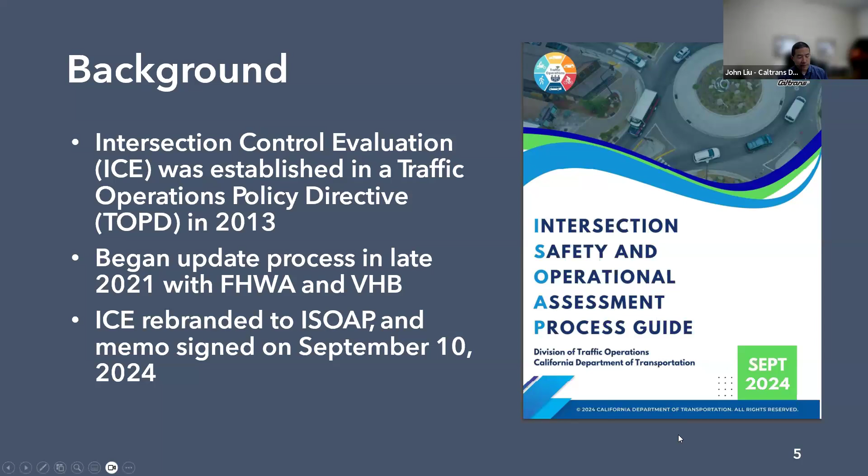Many other states, about a third of the states, have some kind of ICE process, and several states have had many iterations with improvements. So we really wanted to work with our partners at FHWA. They had their consultant, VHB, come on board, and we developed, over the past 2.5 years, the new ISOAP. We also wanted a rebranding that really kind of emphasized safety, so safety is part of the actual name of the new process.

So going back in time, what was ICE? ICE was a framework to make decisions for intersection control. It wasn't really meant to be a new process, just a framework to help guide the decisions that are to be made. It was a two-step process: you had your initial screening, which was kind of the fatal flaw analysis, just so that you could drill down to look at the most viable potential alternatives, and then you went into the detailed engineering analysis. That's going to be very similar to what we're doing with ISOAP. We didn't want to start with a blank slate because a lot of ICE actually worked very well, so we really wanted to build upon ICE and just make it a little bit more effective.

And why did we need to update ICE? Besides the length of time, Caltrans has a lot of new strategic directions that we're trying to incorporate in how we could better design, maintain, and operate our state highway system. A big emphasis on complete streets, we have a Director's Policy 36, and here we have our Vision Zero target for 2050, where we want to eliminate all fatal and serious injuries, not only on the state highway system, but on the entire transportation network, including the local street and road network and tribal lands.

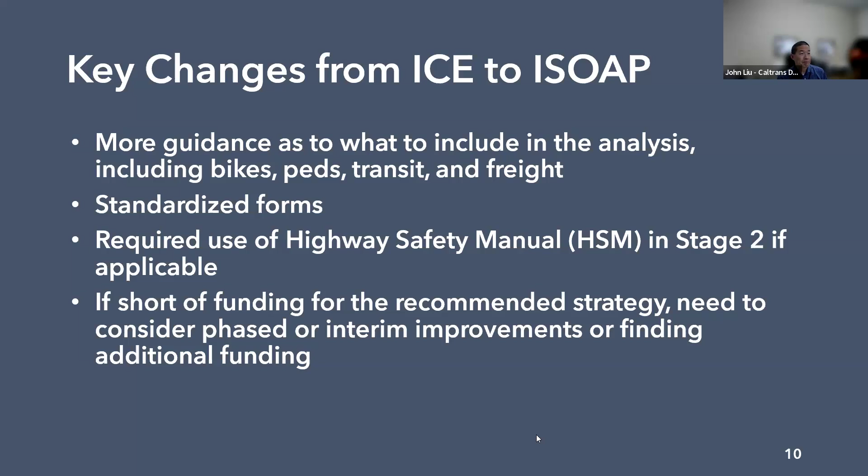So the solution needs to support a safe system approach, and this is also very context sensitive. When you're looking at locations with a lot of access points and vulnerable road users, that's where we want to make sure our infrastructure supports those types of users. We also want to make sure our staff in the traffic safety branches concurs with the recommendations ultimately made for intersection control.

We do have some streamlined processes for a couple situations. The first is you can automatically go to a stop sign if it's a very low volume access point, where signal warrants are not going to be met within 20 years, and there aren't any special features or conditions that would warrant additional controls.

The second streamlined process is for single lane roundabouts. If you have relatively low volume, 25,000 ADT, you could go directly to a roundabout without analyzing the signal as an alternative, if signal warrants are going to be met within 10 years, or if you have a crash history that can be addressed with a roundabout or signalization, and if the cost of the roundabout is somewhat commensurate to signalization.

We do know that a lot of times there is public concern and controversy. So if you are expecting that, or if you're having to go through an eminent domain process, you're going to want to go through a rigorous environmental process and look at various options and alternatives. Just keep that in mind if you do plan to use a streamlined process.

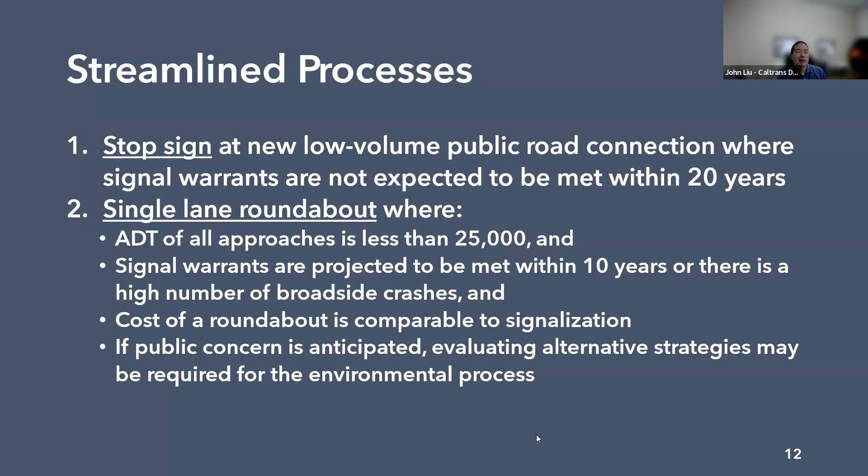We do have a question, John. We have one question that states: can you elaborate on what you would like to see as part of the HSM analysis in stage 2? Is Caltrans planning to update their HSM application guidelines?

Great question. One thing we recognize is not a lot of folks are experts on the Highway Safety Manual, and there's actually going to be a revision to the Highway Safety Manual, a document put out by the feds. Within Caltrans, it's our division of design that takes the lead in providing support and training. For our local partners and consulting engineers, my recommendation is to work with your districts to see what training the districts offer. I can't specifically talk about what additional guidance or training headquarters is going to provide, but because there are a lot of changes coming to the HSM, I would expect additional guidance.

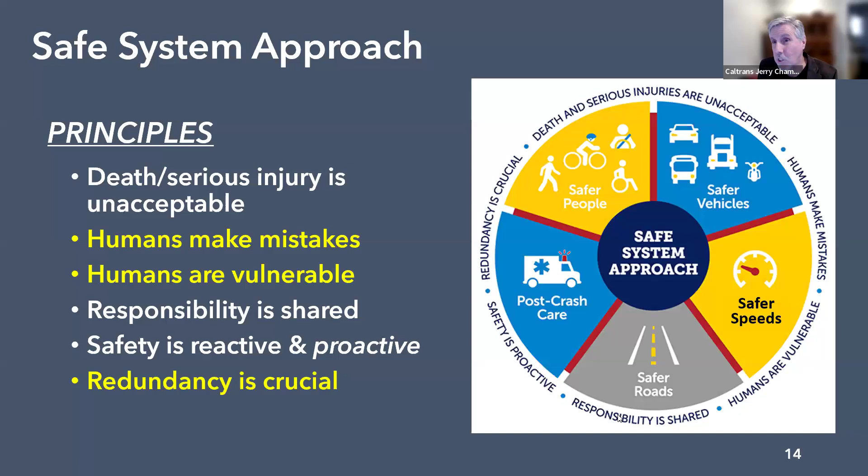Another thing to emphasize as we go through this, and later in the program Phil Rust in particular will talk about how important redundancy is, redundant systems to get to the outcome we want, which is zero, eliminating fatal collisions. Again, humans make mistakes, road users make mistakes, everybody makes mistakes, and that's part of being human. So the question here is, why should people have to pay the ultimate price when they make unintended mistakes?

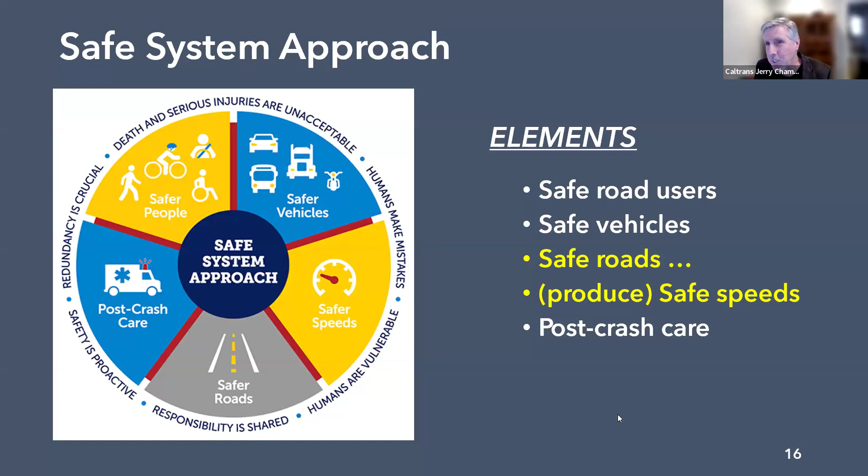Let's go forward. Thank you. The other thing to really keep in mind today is what's important about the safe system approach is its emphasis on safe roads or infrastructure, and in particular, infrastructure that produces speeds that are safe. This is where there are a lot of strategies for intersections, some of which get partial reductions in speed, others get full or 24/7 reduction in speeds to a safe speed.

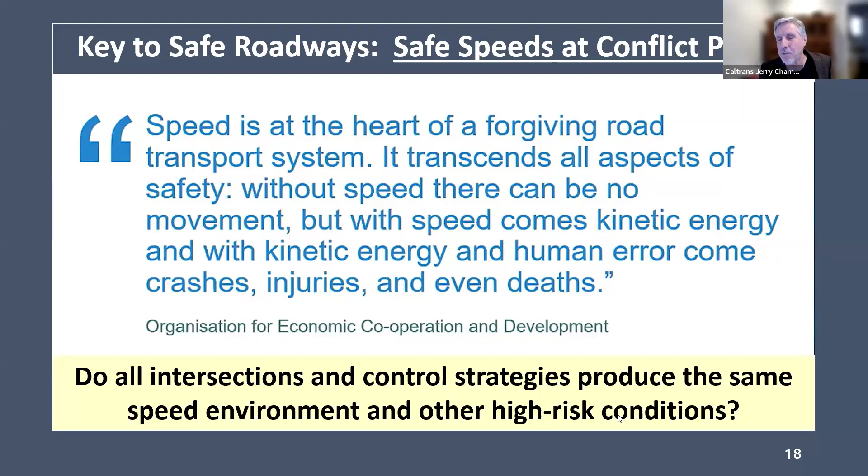The main point here is that ISOAP is a tool, a process, that helps us identify the optimal solution, not just for safety, but considering the most important goals we have, mobility being one of them, even environmental goals. Let's go forward. So I'm going to talk now about safe system intersections, let's go forward.

What's important today is we know that traffic safety has for a long time been a reactive practice, one that is in response to problems. We do have programs now and emerging ones looking at systemic safety and doing things proactively. But ISOAP is proactive in a way. It's used for all projects or capital projects that include intersection or interchange improvements or the addition of those things.

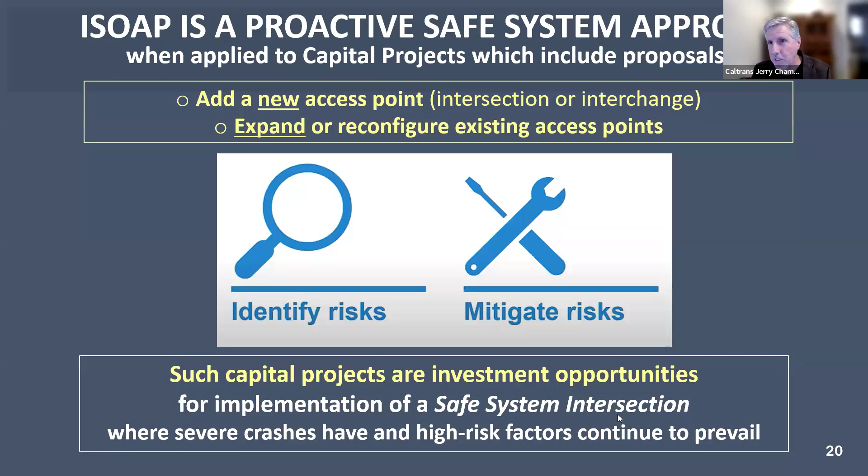So it's not just for projects at spot locations, but could be long corridor projects in which access is part of the solution. What we're doing is considering the safety risk and also the outcomes for all projects, not just looking at safety within the context of a safety improvement project. So whatever the capital project is, if access is part of it, ISOAP will help us identify the optimal solution based largely on how the different alternatives perform in terms of safety performance.

Just to touch on where we have been and where we're going with the safe system approach, I think ISOAP is doing all of this right now. I want to mention a few things highlighted here. The traditional approach, reducing crashes, has always been a goal, and of course now the focus is on preventing death and severe injury. Traditionally we've been trying to help drivers and others make better decisions, good behaviors, whereas the safe system approach acknowledges it and says let's just design for those mistakes.

We'll never prevent them. From traffic calming and speed enforcement, always trying to accomplish lower speeds with tools that can't get us there, safe system is now focused on reducing the transfer of kinetic energy when there are crashes. Again, acknowledging crashes are going to happen just like people make mistakes, but let's lower or reduce the outcome. Of course, designing for peak conditions has always been something we do, but now we want to look at all conditions, including darkness. We'll get into comparisons of some solutions that are safe system and others that have safety as part of the benefit. Let's go forward.

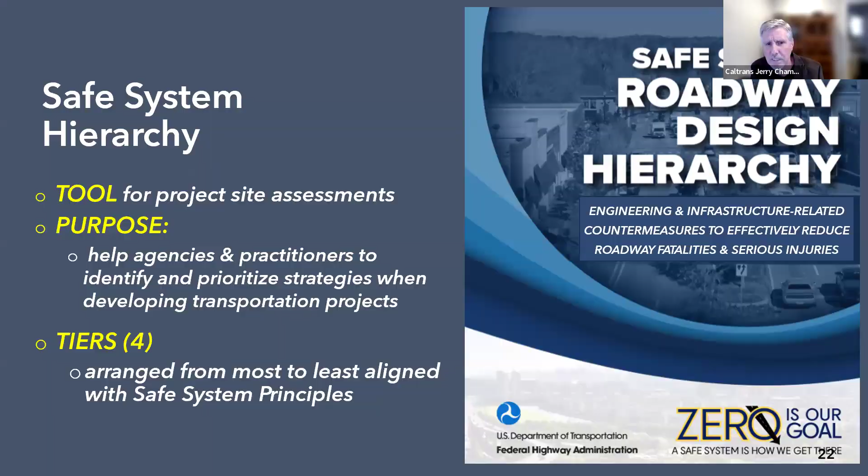In these tiers, tier 1 best solutions are those which remove severe conflicts. Tier 2 is reducing vehicle speeds, which can go together very well with tier 1, both equally important. To a lesser degree, tier 3 is managing conflicts in time, such as traffic signals. And tier 4 is increasing attentiveness and awareness.

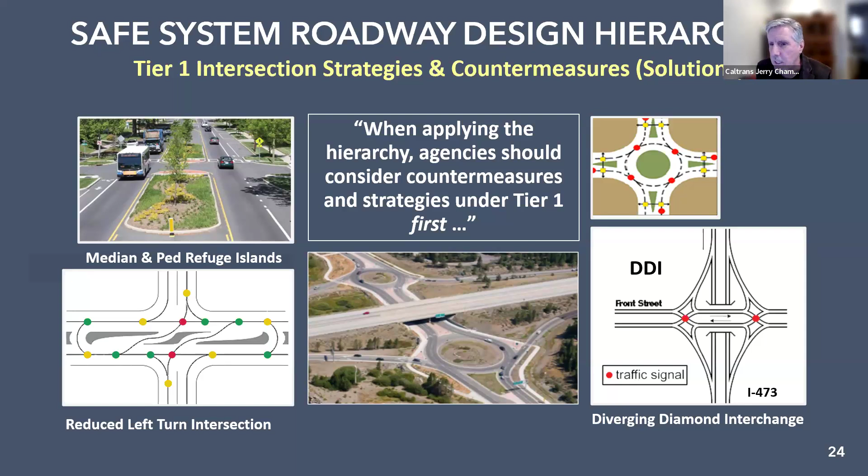These are examples of strategies identified as aligned with tier 1 of the safe system. The whole point of this hierarchy is that when applying it to projects, agencies should always consider the countermeasures and strategies under tier 1 first, prioritizing improvement alternatives by looking at tier 1. We'll cover these in more detail - especially the reduced left turn intersection, or R-CUT, roundabouts, and the diverging diamond interchange.

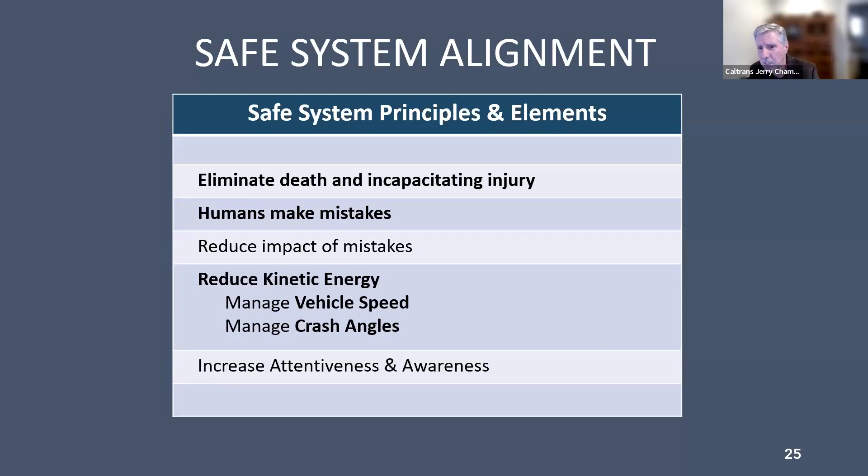Going back to earlier slides, I pulled off a few of the more important things to see if we are working and pursuing improvements that are in alignment with safe system - these are the key principles and elements. I've already mentioned these, but I want to come back to them in a minute.

If you look at where our most severe crashes occur on the smallest part of the overall transportation system, it's a lot easier to focus on access points than on segments and corridors - it could also be less expensive. So it's very logical to look at intersections as we jump off, and some of our partners have already done this, looking at intersection safety programs in particular.

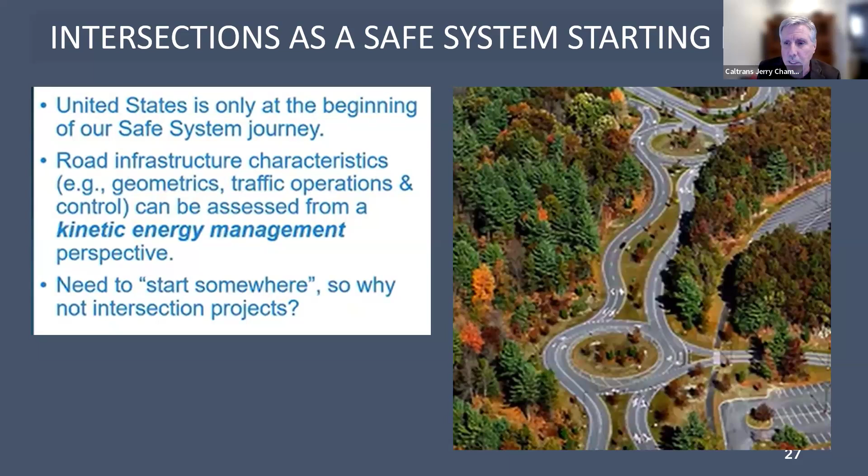So again, looking at where do we start, or where can you start as an agency - intersections should definitely be prioritized.

So let's go back to the other strategies. In addition to roundabouts and traffic signals, which I've already talked about, let's go forward and look at the list.

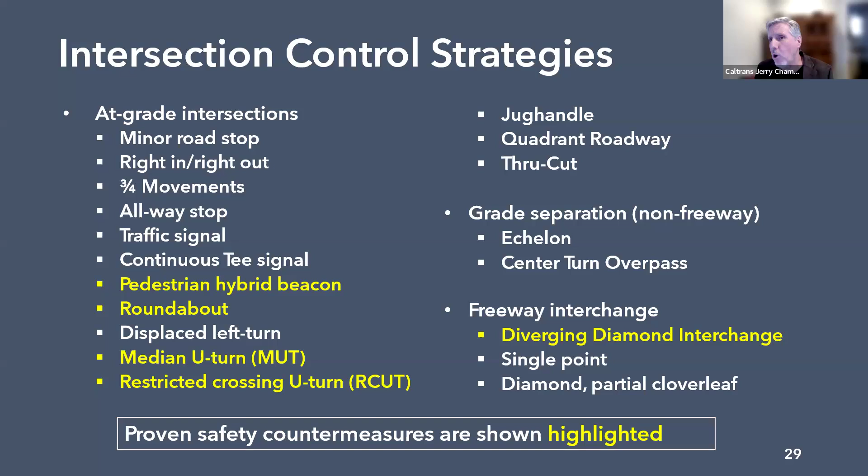And these are proven safety countermeasures. That's why we want to look at these first, because they are solutions for all access or new access, but they also have the best safety performance. Let's move forward.

One of these, the pedestrian hybrid beacon, is definitely a proven safety countermeasure, but has limited applications—this is really for pedestrian crossings only, and it works part-time. So it has minimal impact on traffic flow, unlike signals, but is very effective.

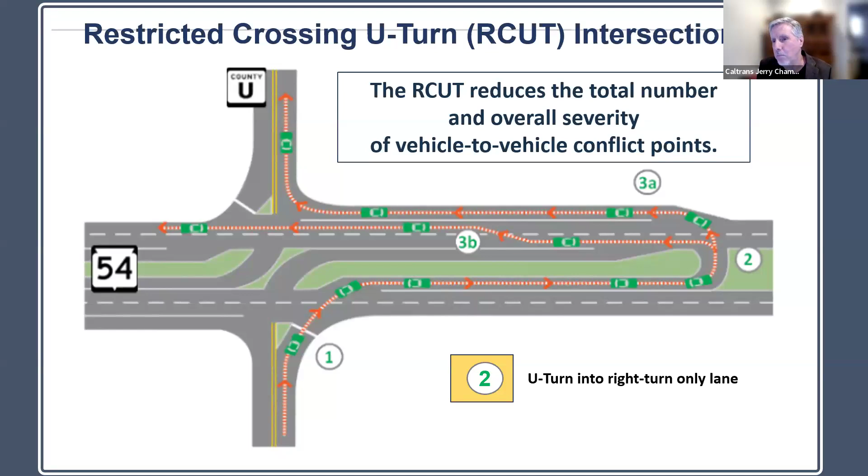Let's go next. I want to talk about and then show you a couple of examples of what are overall called reduced left turn conflict intersections. People might know these better under the terminology restricted crossing U-turn, or R-cut intersection. Basically, this takes movements at an existing intersection and converts and relocates those, in particular the crossing movement—in this case allowing drivers to turn right in order to go straight or left. So it definitely has pros and cons with respect to mobility, but is proven to be safer.

And again, these benefits range from primarily around 50% up to 63%, depending on the type of controls added to those intersections. And again, the intersections are at the major approach, but U-turns are also introduced on either end. Let's go forward.

Roundabouts. This is worthy of a virtual tour because there are now so many different types. They come in all shapes and sizes, and of course that means costs as well. The good news is there are much lower cost versions of roundabouts, in particular the smaller roundabouts.

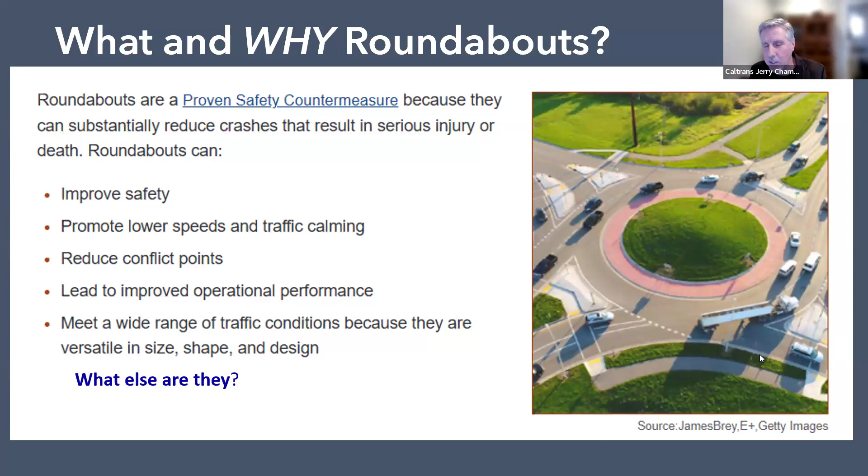These are emerging as being very effective for a significant range of volumes. Roundabouts do more than improve safety, obviously. They calm traffic, and they handle traffic more efficiently. No waiting, no stopping when there is not a conflict is the main reason for that. So operationally, they're as good as you can get at an intersection control strategy.

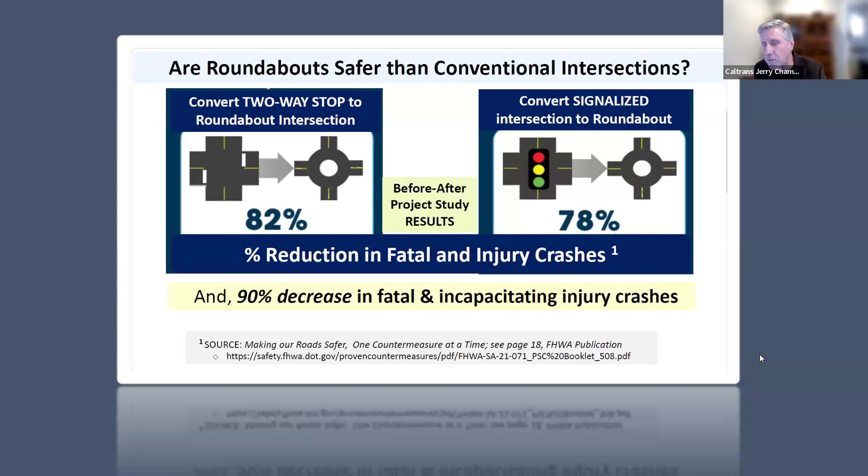For safety and a safe system approach, this is very important. This has been known for a long time, and various studies have supported this finding. Converting an existing intersection that is signal or stop sign controlled gets about an 80% reduction in fatal and injury crashes, and even more importantly, a 90% decrease in fatal and very severe crashes. This shows the difference between the safety performance of roundabouts and traffic signals.

The range of applications - roundabouts can be the key for road diets to work, being able to implement a road diet without causing a problem or diverting traffic to other corridors. It's been proven that you can eliminate or replace traffic signals to get narrower roadways, and roundabouts handle that traffic.

We now have so many different shapes and sizes, and there's a term that's come out in the last 10 years or so calling these affordable roundabouts. These can be installed for a fraction of the funding and time required for conventional size roundabouts, and even materials and construction methods differ.

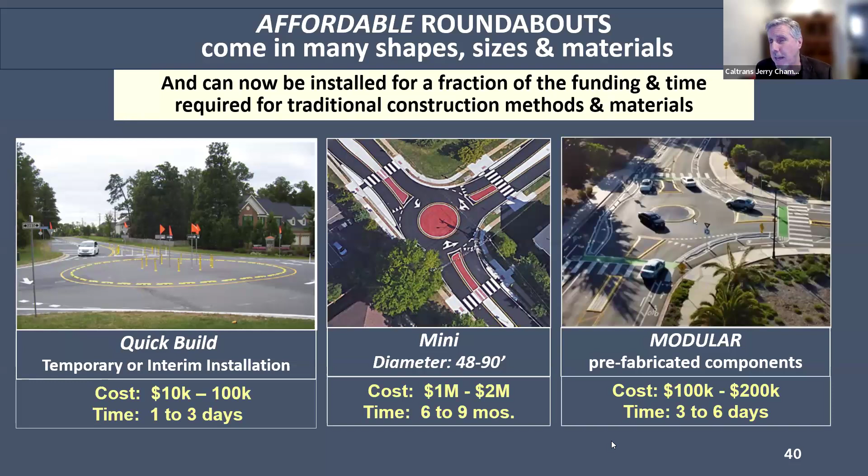This is another important development, because modular means prefabricated components that are basically installed onto or nailed to the pavement in general. If you think about footprints in 3 dimensions, we're saving work instead of excavating, which we normally do for repaving. This avoids much of that expensive excavation work, by being able to work within an existing intersection footprint, with installation on top.

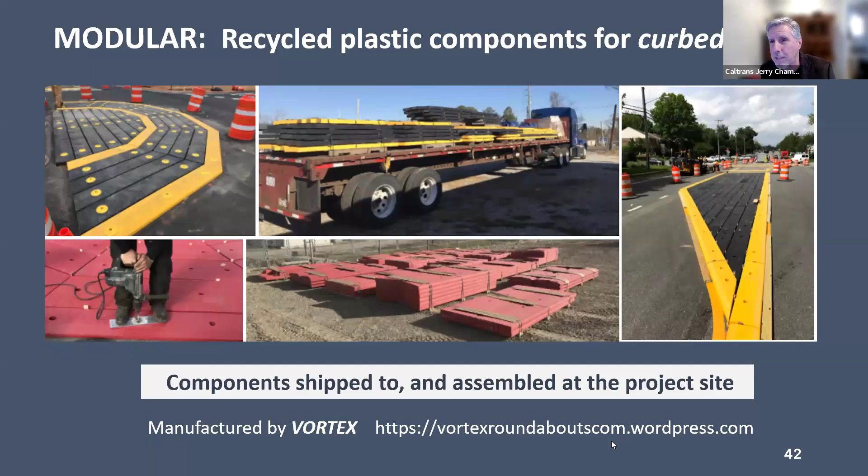This is also good news - modular products can be installed for a variety of other islands, including protected bikeways, pedestrian refuge areas, median crossings, etc. I want to mention quickly, this is the first of some case studies that can be shown. This one we learned about just recently, from the evaluation of a corridor project.

This is from Cleveland, Ohio, where many roundabouts were installed in the corridor, I believe 7 in all. And we can now report the preliminary performance, the benefits out of this project.

The 2 pictures here show the pre-project condition, a series of traffic signals along a collector arterial through a residential neighborhood, an older neighborhood, 2-lane road. And then the post-project looks, you can see the yield signs representing mini roundabouts. So basically they installed 7 roundabouts, eliminated 6 traffic signals.

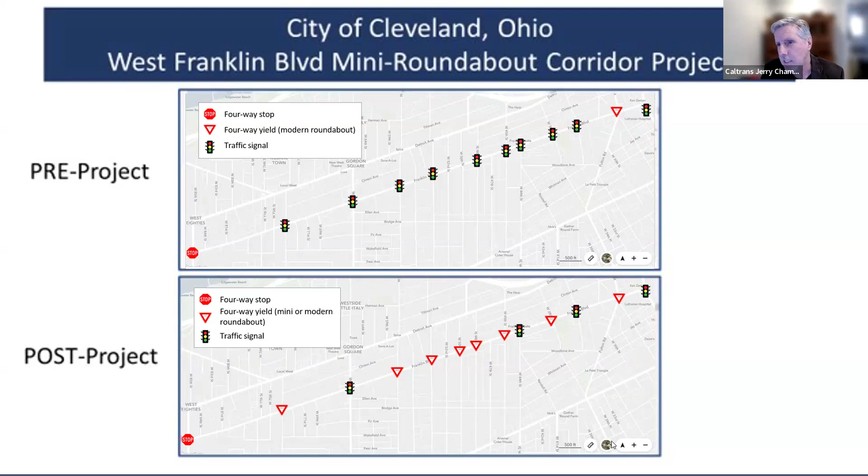Post-evaluation progress so far. What's most important here is the change in speed pre-post, and reduction in crashes. The speed was reduced. This was one of the goals, taking what was signed as a 35-mile-an-hour corridor. The observed speed afterward was down around 23 miles an hour. So the city has already changed the posted speed limit. It is now a 25-mile-an-hour corridor.

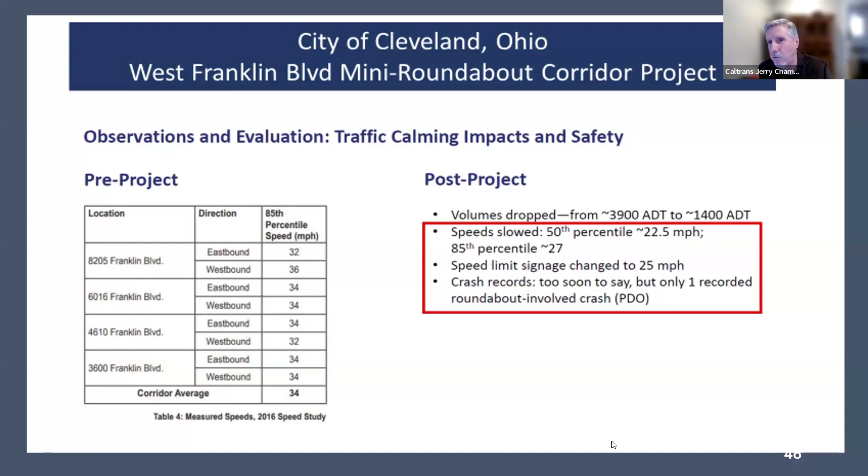And the observed crashes, reported crashes I should say, so far include only 1 minor. And this was one of the motivations for the project. It was a crash-prone corridor, including severe crashes over the years.

Thank you. Next. And to wrap up, again, not quite done with the roundabouts yet. The latest is the turbo roundabout, which has a higher capacity. So definitely something that is relevant for ISOAP and looking at where capacity is a problem.

Instead of continuously widening intersections in order to help traffic signals handle peak hour traffic, larger roundabouts are providing good flow and capacity as well. Question is, do they provide the same safety benefits as the smaller roundabouts?

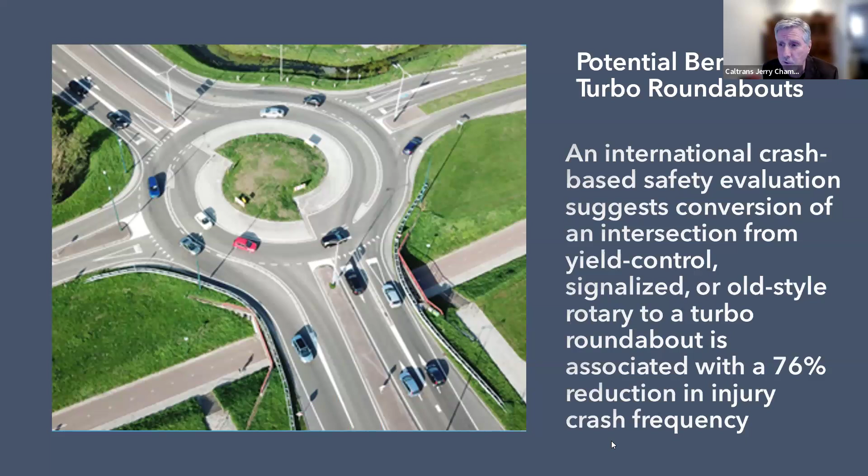The good news is that they are, based on international experience, at least so far, getting a very good reduction in injury crash frequency, 76%. Next. The last of the strategies, again, mentioned in the FHWA's roadway design safe system hierarchy.

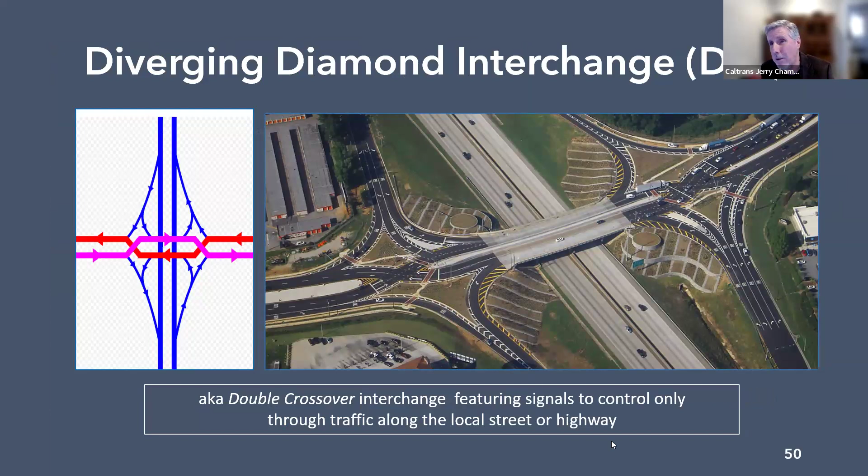Diverging diamond interchanges. There are about 80 now in the US, and I know several in California. Let's go forward.

This is identified as a tier 1 safe system interchange configuration, largely because it eliminates most of the crossing type crashes that you would see at conventional signalized or stop controlled intersections.

We won't get into the detail here, but the problem is, if you just go on looks, it looks like it could be very daunting for not just drivers to get through, as shown in this picture, but for pedestrians and cyclists. But the good news is that the performance, like roundabouts, has been very good so far.

Next. Oh, I'm sorry, just go back real quickly. I think what I wanted to emphasize here was so far the reduction in crashes is about 44%, and that's fatal and injury crashes where DDIs have been installed and evaluated.

Let's go forward. And I'm going to skip this until later and see if that, yeah John, I want to hand it back to you.

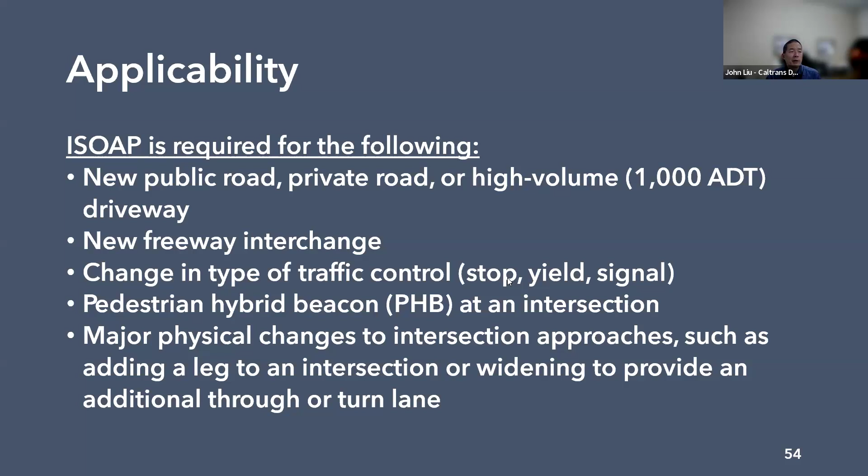We want to make sure that we're making the best investment decision. So conversely, when do you not use ISOAP?

If you're only restriping, if you're doing a road diet, but you're not actually changing anything with the physical roadbed, then you don't have to go through ISOAP. If you're doing a road diet, you're going to want to do an operational analysis, but you're not going to have to go through all the steps and stages of ISOAP.

Any kind of signal modifications, changing timing, software, if you're restricting movements, if you're putting in a diverter, if you're putting a right turn only, if you're doing an R-cut without any kind of widening, technically you don't have to do ISOAP. Go ahead and do the operational analysis, look at any kind of diversion impacts, but you don't actually have to do ISOAP.

So as far as when do you do ISOAP? Just like with ICE, you would typically do stage 1, which is kind of like the fatal flaw screening, during the PID or prior to the PID.

If you're doing a conceptual report, then you could go ahead, if you have the information, to do stage 1 of ISOAP. If it's necessary to do stage 2 because you have multiple potential strategies, then you would typically do it during the PA and ED stage.

Now, you could always do it before the PID or the PA and ED, but if you have more information that arises, for instance during the environmental document, by all means you could absolutely reopen stage 2 of ISOAP and do a reevaluation.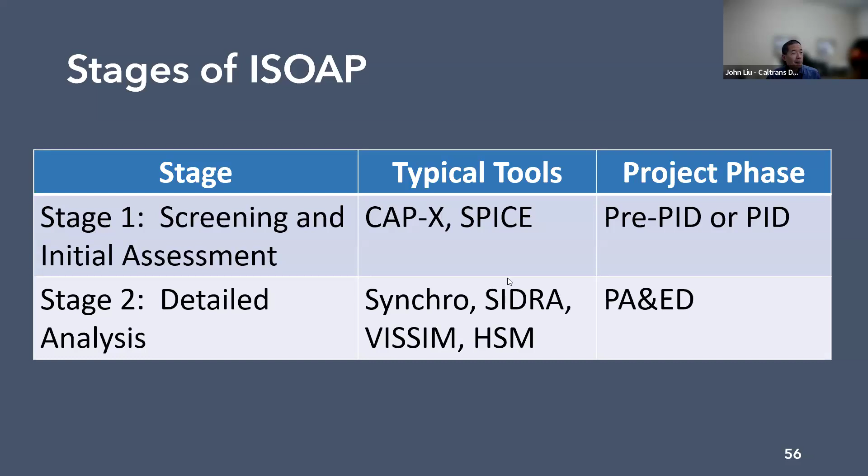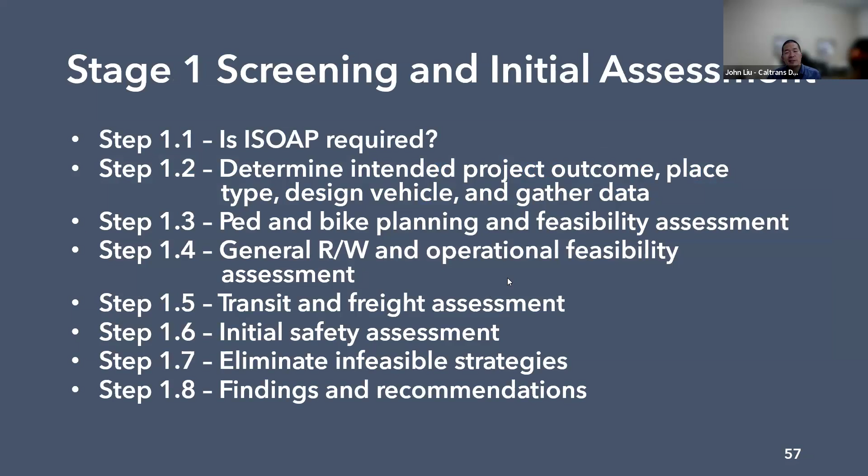I'm not going to have time to go into all the stages and steps in detail. I'm going to go through them really quickly. Stage 1 does have multiple steps, which I'll cover very quickly, and then stage 2, a detailed analysis, likewise.

So when do we typically cover ISOAP? I mentioned that if stage 1 is for a capital project, you're going to do stage 1 during the PID, and stage 2 during the PA and ED.

For Caltrans staff doing traffic investigations, if you're doing what we call a TIR, a traffic investigation report, then you could do stage 1 of ISOAP if you have enough information. You could actually do it prior to initiating a capital project.

Conversely, if you don't have enough information, you could actually initiate the capital project, open up the project EA, and wait until the PID is open for stage 1 of ISOAP to be done.

If you're doing an investigation and it calls for, for instance, changing a 2-way stop to a 4-way stop, and if you decide that's the right decision, then you have to open up stage 1 of ISOAP just to document the decision process. So prior to doing the maintenance sign installation order, you'll want to do that stage 1 of ISOAP.

For local development review, this is typically when a developer wants to do an improvement that affects the state highway. Very often it's having a new access point, a new driveway to a shopping center, for instance. Typically, we will be asking for ISOAP to be done during the planning process, during local development review. That way, when the developer applies for an encroachment permit, typically the documentation is going to be a PEER.

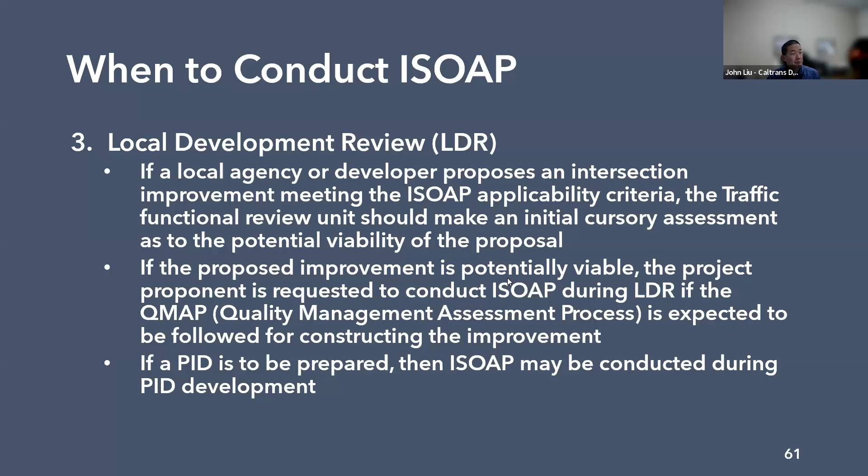Okay, very quickly covering some of the roles and responsibilities. I just want to cover two key roles. One is the ISOAP engineer. The ISOAP engineer is the practitioner who is almost like the project manager of the ISOAP process, gathering all the information, the documentation, getting information from the project engineer, from the traffic operations engineer, from the traffic safety engineer, compiling the data, and documenting it.

The ISOAP engineer will very typically be a traffic operations engineer. It doesn't necessarily have to be a project engineer. The other thing I want to point out is it doesn't even necessarily need to be an engineer. It could be a transportation planner, it could be a technician. We would just recommend that the activities be done under or

reviewed by an engineer. The other responsibility I want to cover is the district ISOAP coordinator. This is going to be the Caltrans staff person within traffic operations who's going to be providing the support for ISOAP. They will also be reviewing the documents for completion, for routing, and for approval.

So every district will have at least one ISOAP coordinator, and I've listed the names of the current ISOAP coordinators. The one thing I also want to mention is later on, I'll be talking about the training. If there's some specific training needs or questions, feel free to reach out to your district ISOAP coordinator. These names are also posted on the Caltrans ISOAP website, so they'll be kept up to date over there.

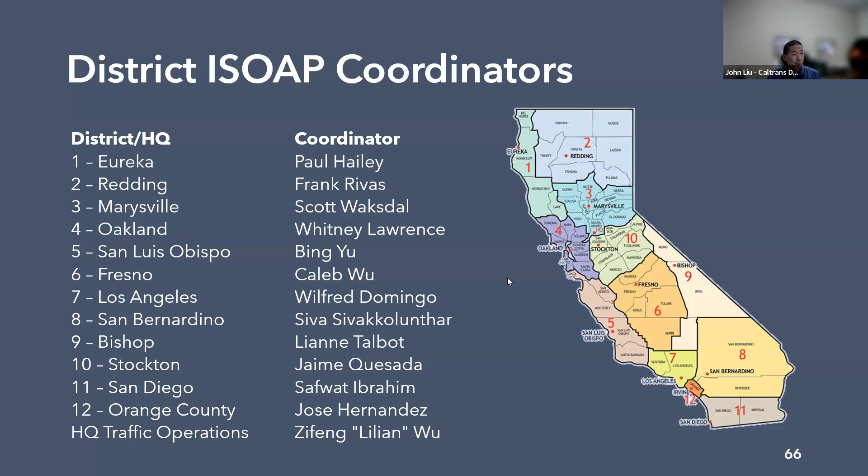So just moving on, I want to briefly talk about some of the analysis tools. Again, I don't have time to go into detail, but during the screening process, there are some computer programs that can be used to help determine what are some appropriate intersection control treatments to be looking at. FHWA has their safe system for intersections methodology, where it compares different types of intersection treatments that are appropriate for

some specific traffic movements and patterns. FHWA also has an ICE tool where you input volumes and other kinds of data, and it's going to give you what the most likely intersection treatments can be. Virginia DOT has what they call the VJuST tool. A more experienced practitioner will, by looking at the existing intersection, the traffic volumes, and the conflicts and collisions, be able to make the judgment as to what are the most likely feasible types of intersection treatments to look at. But for the more novice engineer, these are some tools that they could potentially be using.

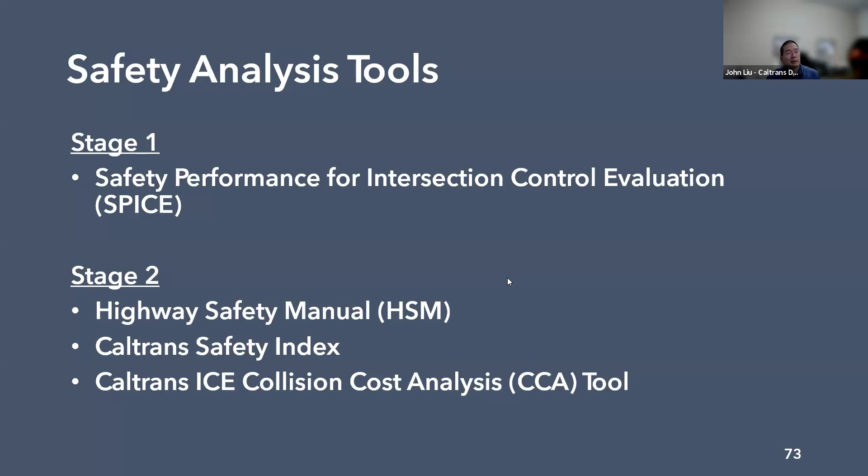For safety analysis, FHWA has their SPICE tool. As I mentioned before, if you have to do stage 2 of ISOAP, we do have a requirement of using the Highway Safety Manual if it's applicable, but we know in many situations it is not, so you'll want to do a more qualitative analysis. Other tools we have are our Safety Index tool, and specifically for roundabouts, we have the Collision Cost Analysis tool. But Safety Programs is doing a lot of updates to their various collision tools right now, so there'll be changes in probably the 1 to 2 year time frame where these tools will be updated.

As far as operational analysis tools, FHWA has their CAP-X tool that can be done during the screening. And the more traditional traffic engineering tools, when you have traffic volumes and are looking at intersections, the Highway Capacity Manual—we have Synchro, which is based upon the Highway Capacity Manual, and VISSIM, particularly for corridors. For analyzing roundabouts, SIDRA is our preferred software. There's also RODEL, which is an alternative software for roundabouts.

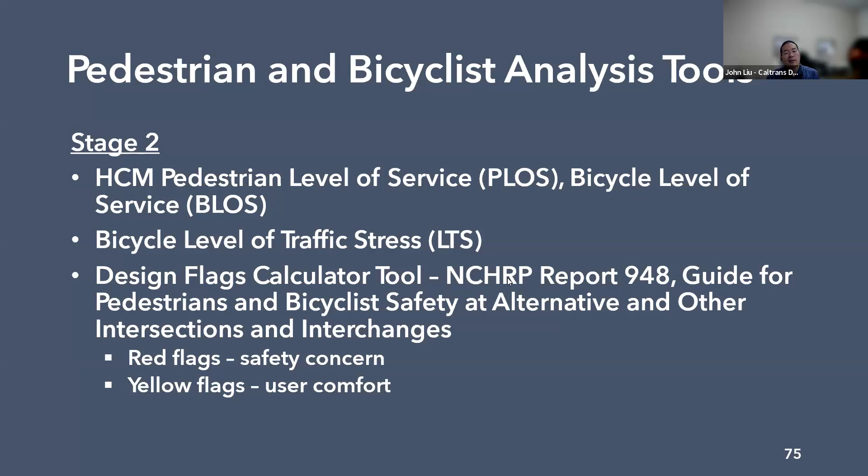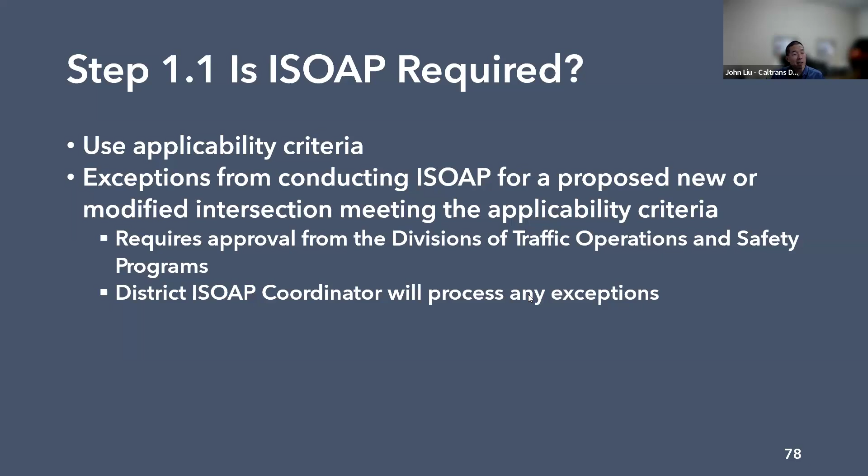So you want to figure out what you're trying to solve or do with a particular type of change. A lot of times it's going to be improving safety, improving operations, reducing the queue. It may just be calming traffic, but we want to figure out the need for the project without using language too much into the environmental realm. I'm not saying this is the need and purpose, but kind of along those lines - what do you intend to accomplish with your proposed project?

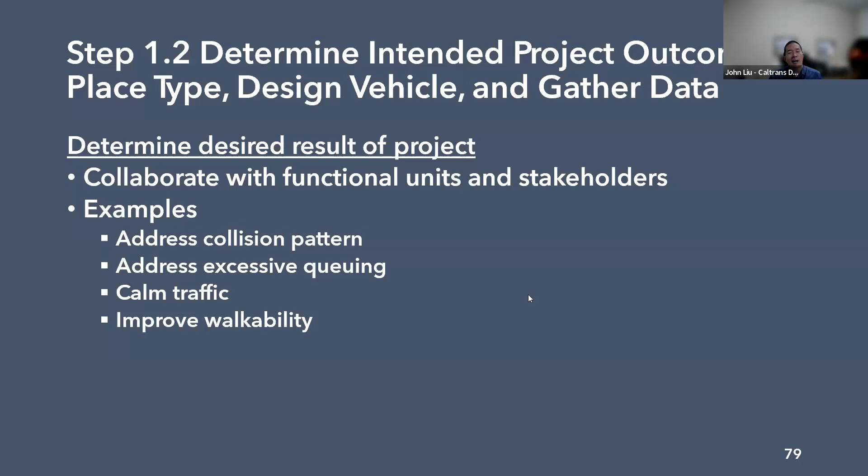You want to gather as much data as you can, because during stage one of ISOAP, you're not required to go out and actually do traffic counts or a lot of analysis. You just want to gather data to figure out what has already been done out there, what kind of planning studies, for instance. So you're gathering traffic data, planning data, determining what the appropriate context is, what the land use is, and how the highway eventually is going to be configured in the future.

It may be a rural two-lane highway now, but a few years from now it may be a suburban or urban conventional highway. So we want to determine how we envision the route to look in the future, and we want to start being prepared to accommodate pedestrians and bicyclists if we expect this location to become more urbanized. So determining the place type is very important.

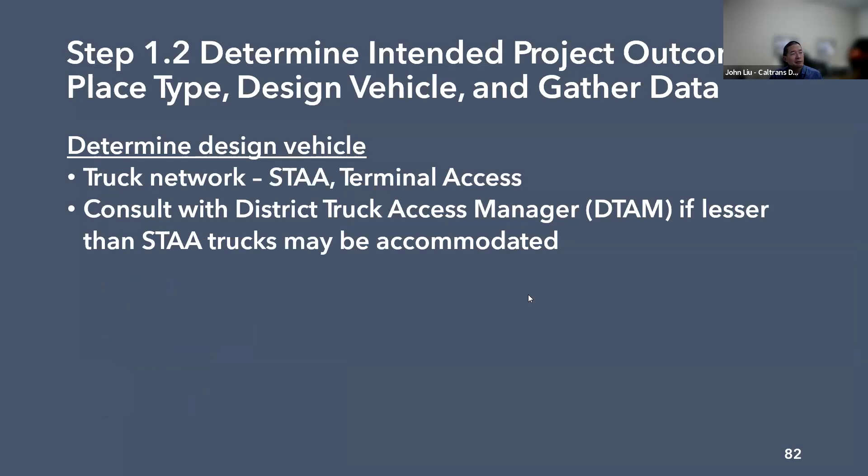You want to determine what the design vehicle is. Caltrans has various truck maps that we could refer to. We have different truck access managers who could be consulted. And we want to do a qualitative assessment of the bicycle and pedestrian facilities.

This goes back to the context I was previously talking about. If this area already has pedestrian and bicyclist activity, you want to figure out what are some of the gaps, some of the needs that could be addressed. Look at the schools and senior centers and if there's any kind of special populations.

And get ideas as far as the right-of-way - what are some of the constraints? If you want to lay out a roundabout, what may be some issue locations as far as getting that footprint. Here we're using our experience based upon typical volumes of this type of facility, the sizing based upon the type of truck you're designing for.

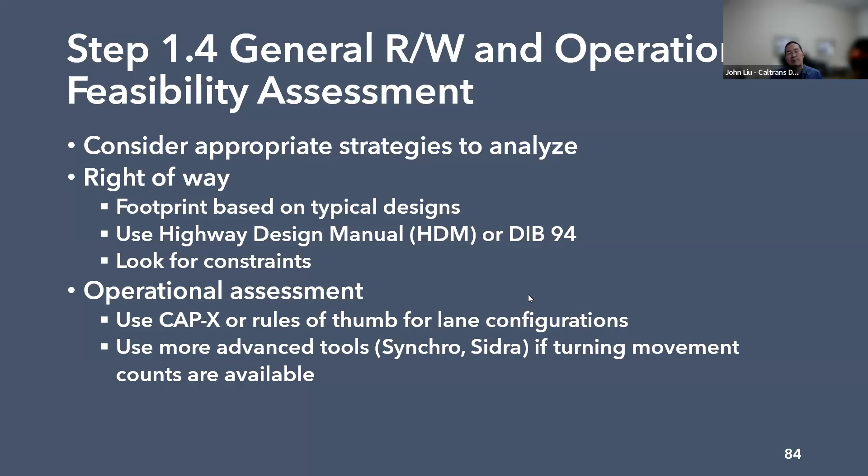You're not doing a very rigorous analysis with performance checks. Here you're just trying to get a general footprint to figure out what seems to work and be reasonable at this particular location. I talked about the tools earlier that you could use - you want to get to maybe 2 or 3 alternatives and not have too many at this point, but look at the most viable.

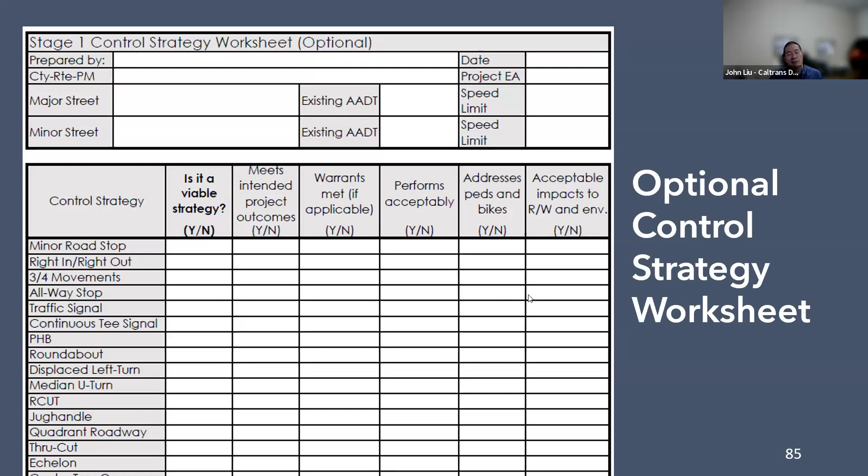We do have a worksheet. This is primarily for the more novice engineer who may not be familiar with a lot of the treatments. But as I mentioned before, someone who's very experienced will be able to target the 2 or 3 types of treatments pretty quickly.

We want to look at the transit needs as far as bus stops, both now and in the future, rideshare drop-off locations, casual carpool, bus shelters near or far side, because increasingly transit is going to become more and more important. Also looking at freight - here we want to go beyond what the design vehicle is, but are there oversized vehicles that need to be accommodated? So we're talking to our transportation permits folks up in Sacramento, and looking at the industry.

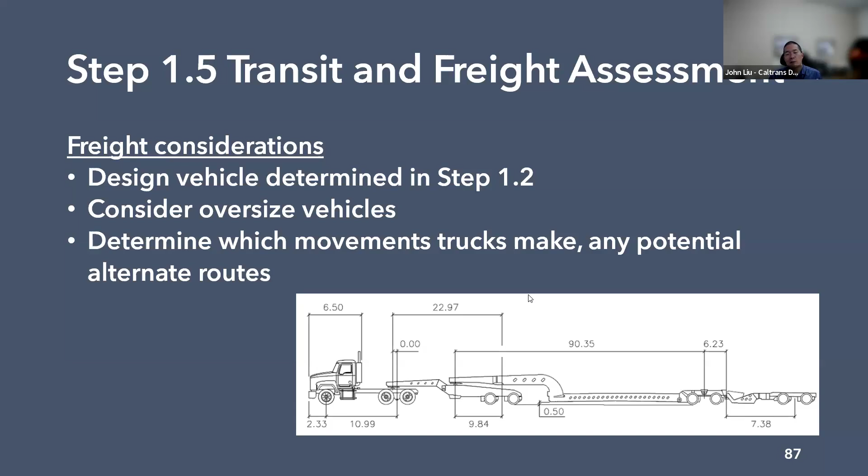Are there industrial areas? Are there agriculture areas where we need to accommodate large trucks? A lot of our roundabouts in District 6 are accommodating low boy booster trucks, which could be 200 feet long. So we may have to look at alternate routes if designing a roundabout that may constrain. But if we have to accommodate, then we have to figure out how. And a lot of times trucks don't have to make all movements, so we need to look at where the truck is coming from and going to.

We do a quick safety analysis. If we have access to the collision data, we want to see what the collision patterns are. But we're also looking at the relative safety of the various types of potential intersection control strategies. And I talked about the SPICE tool earlier.

And then we want to eliminate the infeasible strategies. If the footprint of a roundabout doesn't work, not because you're taking a parking lot—you could generally take a parking lot—but if you're taking a historic building, more than likely that's not going to happen. If there's going to be a PG&E transmission tower that has to be moved, more than likely you're not going to be able to do that. So you're going to want to look at constraints and just use a lot of engineering judgment. What makes sense? We don't want to say that if you have to acquire right of way, that automatically disqualifies any kind of potential treatment. But we want to be reasonable. What could we potentially do with what funding is available, or what funding could potentially be available?

And then we document the findings. If there is only one viable solution, then you're pretty much done—you don't have to go to stage 2. If there is only one viable strategy but you're short of funding, then that's where we want to get your thinking cap on and figure out what we could do to get more funding, what we can do to make an alternative more affordable, and what we can do for the interim.

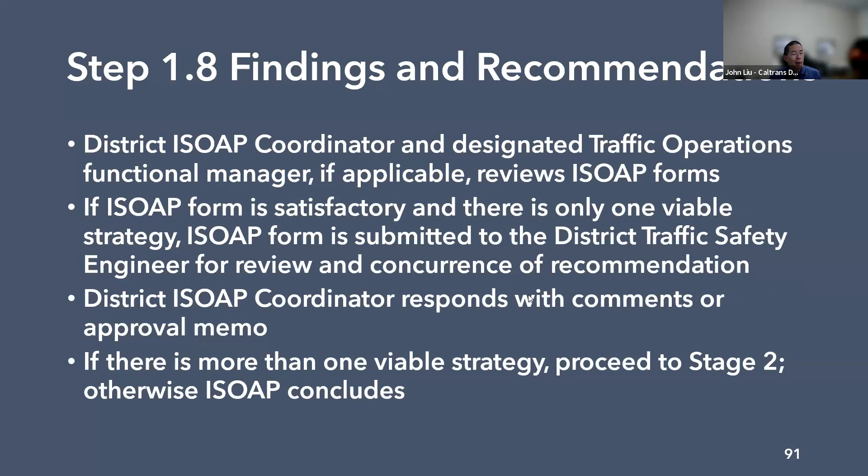And then we're going to fill a form out, and do the routing to the safety engineer if we're going to be concluding the process.

So we have some existing Excel forms available on the Caltrans ISOAP website. We are in the process of developing easier to use fillable Microsoft Word forms, so we're going to have these posted on the Caltrans website within a few days. But as I mentioned before, you're not required to use these forms—it's just an option. And we do have a short form and a long form. The short form is very similar to the Excel form we already have out there.

But the idea is if you have multiple locations with repetitive information, then you may want to use the short form for a lot of those repeat locations on the same corridor, or if you're just going from a two-way stop to a four-way stop, then use the short form. The thing with the long form is it really provides some step-by-step guidance, so I kind of feel it's very easy to follow the long form.

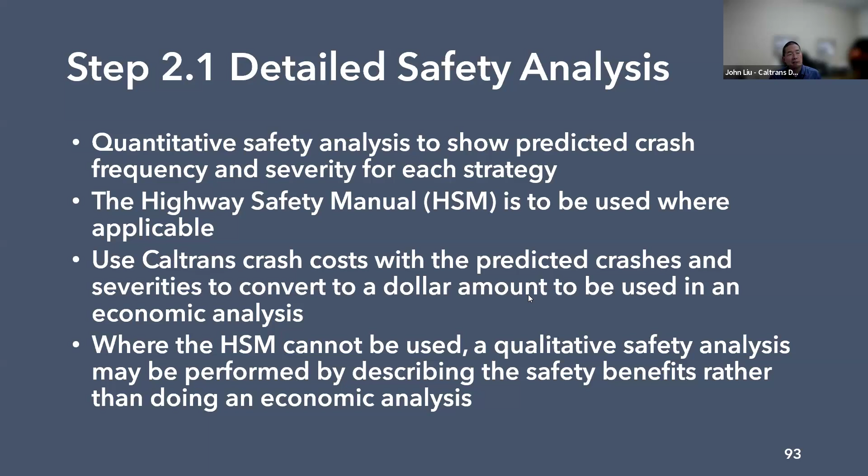So if you have to go to stage 2, this is doing the detailed safety analysis initially. And as I mentioned before, the requirement is using the Highway Safety Manual if it is applicable. And if you can't use the HSM, then you could do a more qualitative safety analysis, or if there are other tools that allow a quantitative safety analysis, that's what we would like you to use.

During stage 2, you're also going to be having the traffic counts and the traffic projections, so you're going to be able to do a very robust analysis using the various tools. You're going to be analyzing for the appropriate periods, and we have kind of moved away from level of service. So in general, you'll be using the daily person hour delay, DPHD, for your mobility measure of effectiveness.

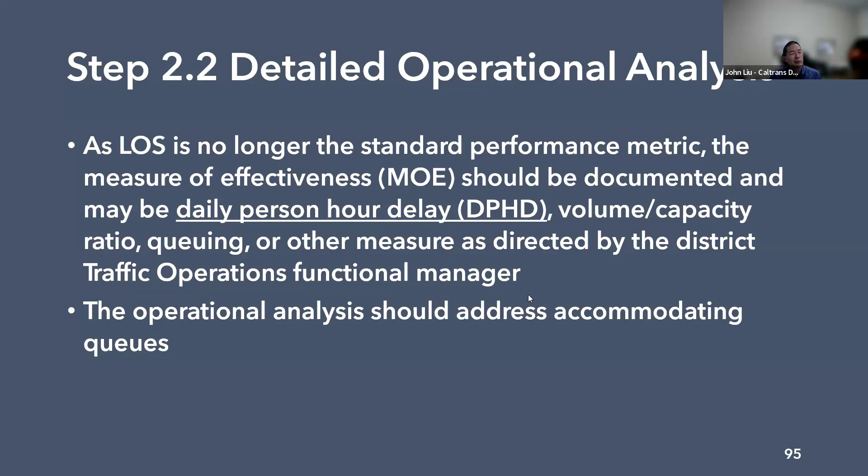But maybe it's going to be something else. Maybe you're designing a project for a downtown location where you're willing to live with congestion, and the local agency may actually have a level of service F standard. So maybe what's more important is looking at queuing, making sure that the bus is going to be able to get through the corridor without being gridlocked. So you may be looking at transit priority, maybe transit only lanes. There are different treatments and measures of effectiveness that you should be considering in these situations.

If you're designing signals, intersections, or roundabouts in particular, you're going to want to be doing performance checks because you really want to make sure your footprint is going to be appropriate—the sizing is going to be appropriate for the traffic volumes and for the type of vehicles.

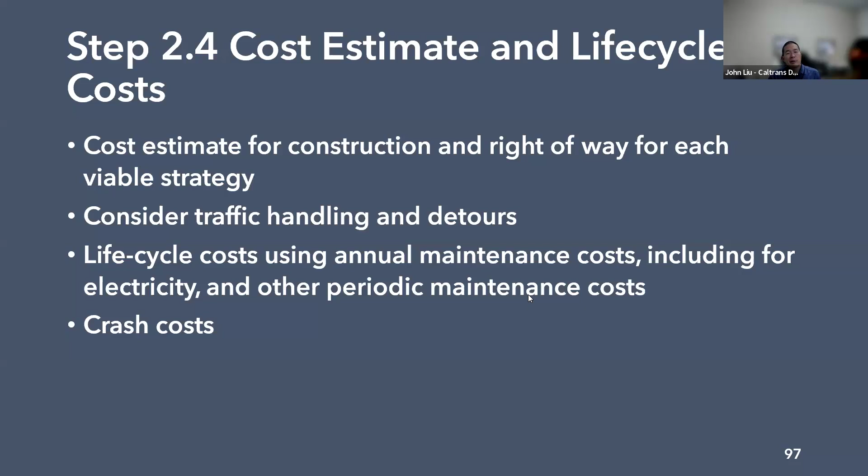You're going to want to be developing a cost estimate, and the expectation is the project engineer will be developing PA and ED level cost estimates. We're going to be able to calculate the benefit cost ratio and then present the data in a performance-based matrix, which I'll show in an example in a few minutes.

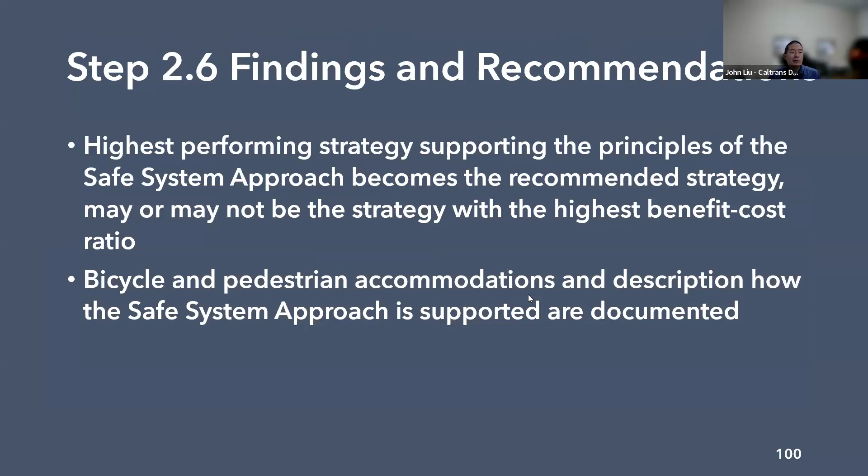Finally, we document in the Stage 2 form. The highest performing alternative will generally become the recommendation, as long as it satisfies the safe system approach, which we want a narrative to describe how it supports.

Again, the costs may exceed the available funding, so get your thinking cap on as to how you may be able to get more funding if you need to. You submit the forms to the district ISOAP coordinator, who routes it to the district traffic safety engineer, and finally the district ISOAP coordinator provides comments and approval.

Similar to the Stage 1 form, there's a Stage 2 form that's fairly short. There's no long or short version, it's just the Stage 2 form, or you could use the Excel spreadsheet we already have posted. One thing I want to note is public outreach.

Caltrans is doing a lot more engagement during our project delivery process. Because ISOAP is generally done in parallel with the project delivery process, public outreach should be built into how projects are being developed. But if for some reason you come up with a new alternative or intersection treatment where public outreach hasn't been done and there's no further plans for it, you may actually have to go back out to the public to ensure appropriate levels of engagement with the folks who will be affected by the project.

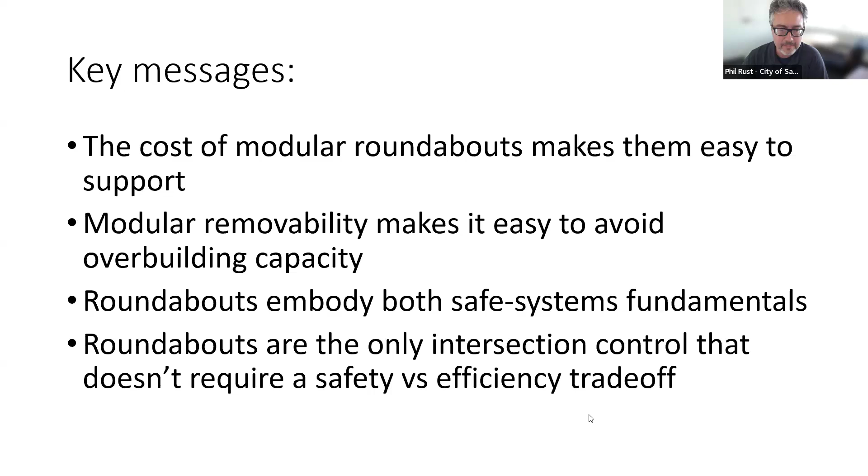In fact, along a corridor of roundabouts, you're going to see the travel time actually go down, which is unexpected because you're also reducing speeds. With slower speeds you'd expect a longer travel time, but because it eliminates unnecessary stops along the way, travel times actually go down as well. So it's a plus for safety, for the environment, and for the economy in the area.

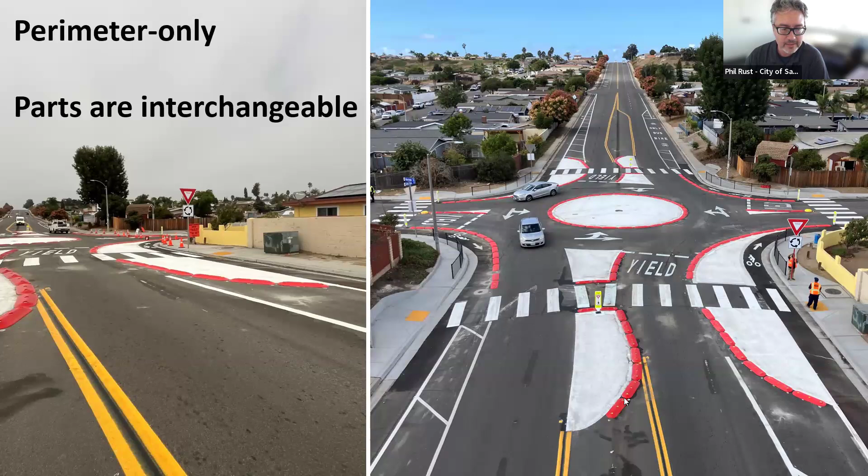Let's go to the next slide. We can see a little more detail on these raised portions on the left - the idea is to only raise along the perimeter, which makes all the parts interchangeable. So we can not only install them much faster, but it's much simpler to put in. This is the cutting edge innovation we're working on right now, trying to put more and more of these around San Diego.

So the second point is really on removability. You can go with today's traffic volumes, which means you don't have to overbuild for the future. Two things happen when you forecast out: first, future traffic volumes are a bit of a guess, so you tend to be conservative and inflate those. Secondly, the capacity analysis tool you're using is also an estimate, so you tend to be conservative there too and inflate it a little bit. That's the danger we get into when we start going down that path.

And really, 1 lane versus 2 lanes is the key - you want to go with 1 lane if at all possible. This really allows you to avoid building in all that guessing and just go with 1 lane if it works today.

The kind of backward way of backing into this and seeing, hey, is that okay? Most of the roundabouts that have been built with expandable features across the country have not needed to be expanded yet. So they've lasted much longer than the models forecasted they would.

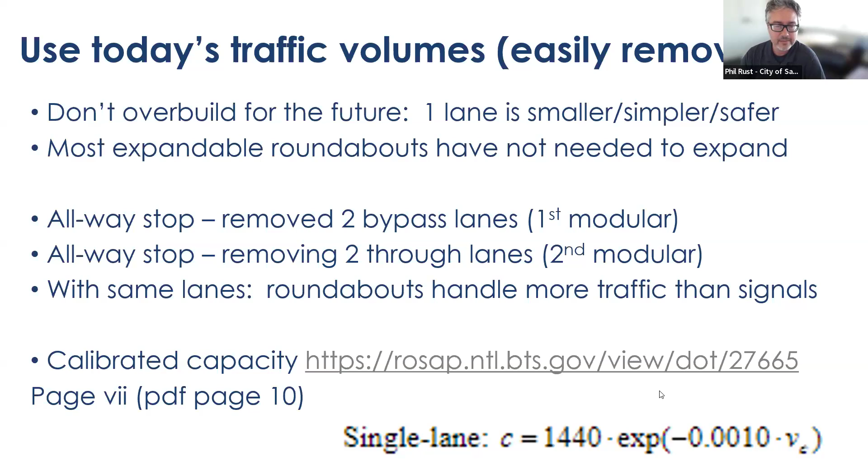Next slide. So as we get into talking again, I'm going to repeat a little bit about safe systems. Comparing it to the traffic signal, roundabouts have an incredible track record in terms of safety.

We have a couple of states, Pennsylvania, South Carolina, that have done statewide studies with 0 fatal crashes at any of their roundabouts, though there might be some in other states. The really impressive stat is that across all of the United States, we have 0 fatal crashes in any roundabout crosswalks. With 10,000 roundabouts and counting, many of them 20 years or more old, that's incredible performance.

So that's essential to keep in mind. But the next few slides, I want to talk about why that might be or how that happens. To make a safe system, you really have two parts as far as the engineering side. One is redundancy. People make mistakes, and there needs to be something else in the system that catches that mistake and compensates for it. That's what redundancy is.

And secondly, people are vulnerable. So if a crash does occur, is the crash energy low? Our intuition about the relationship between speed and energy is fairly linear, but in actual fact, the energy involved in a crash increases as a square of the speed. So it's far more dangerous the faster you go.

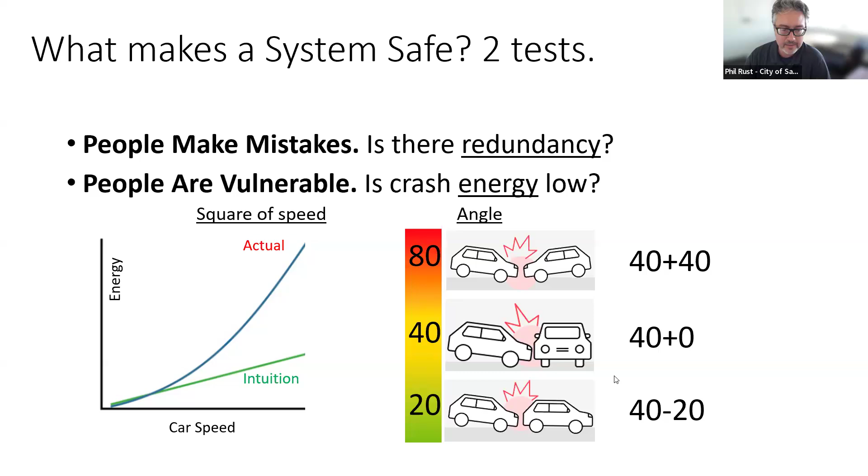You can also see here a little bit about the angle. If it's a head-on, obviously the speeds add, so it's an 80-mile-an-hour crash of two 40-mile-an-hour vehicles. T-bone is 40, rear end is 20. So the angle makes a big difference.

That's almost an impossible task. It may be impossible in many cases if you don't have the sight distance. And in almost every case, when you have a green light, you're not looking. I don't. It's kind of scary to think how we aren't checking to see if someone else is making a mistake so we can compensate for it. And that ends up leading to this issue we have with fatal crashes.

Now, with a roundabout, you do have redundancy. People are interacting with each other, the pedestrians crossing, the drivers, they're looking at each other to see who has the right of way, what's going to happen next. So if somebody does make a mistake, even if you have the right of way, you're going to be able to see they're making a mistake and you can compensate because they're going slow enough and you're going slow enough. The other key thing is that these interactions are simple.

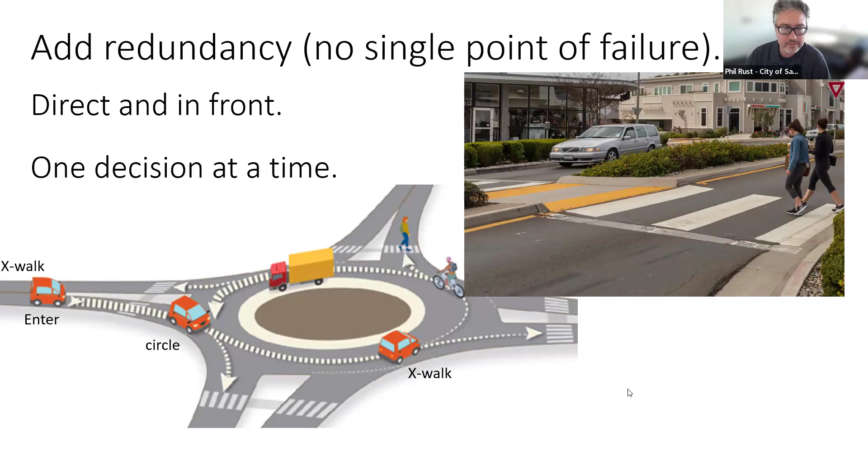It's very complicated. A roundabout is very simple. You only really have to look one direction at a time, whether you're a pedestrian crossing or a vehicle entering. So for a safe system, does a signal have redundancy? No. A roundabout, yes. So that passes the first test.

Second test, speed. Particularly with the roundabout here, we show an example where a radar gun measures vehicle speeds as they approach. As you get closer and closer, you see 13 miles an hour lining up with the crosswalk. That is the slowest point. So no surprise that no one has been killed in a roundabout crosswalk yet. Also note the deceleration going on all the way up to that point, showing drivers have their foot on the brake all the way up to the crosswalk. That's critical to their likelihood of being able to stop in time.

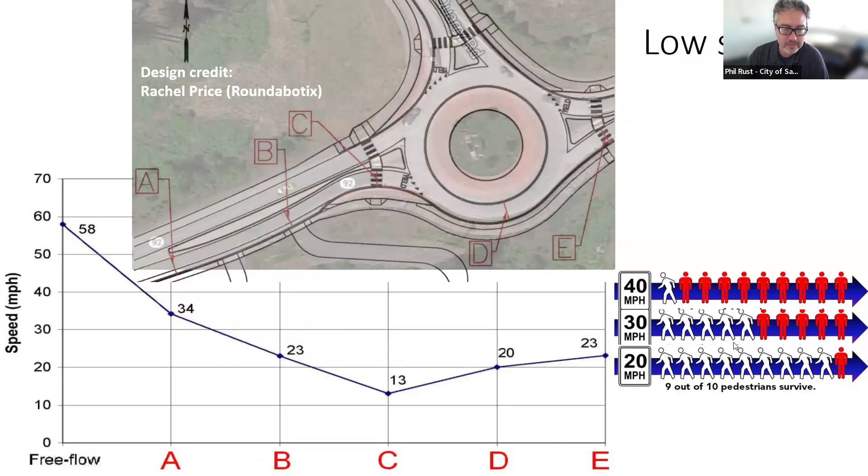So to reiterate, at a green light there's no speed control at all, vehicles going through at full speed. Versus a roundabout, where not only do you have a lower speed as you're approaching, but you can see the curvature there. That helps take energy out of the crash if one occurs, because it's at a slower speed or less of an angle, so it's a side-swipe type collision.

So last slide for me, just talking about this concept where you don't have to trade off safety and operations. If you go from an all-way stop to a signal because you need the efficiency, then you have to trade off safety. The cool thing about a roundabout is it's pretty unique: not only is it more efficient, it's also way more safe, so you're actually getting benefit on both measures.

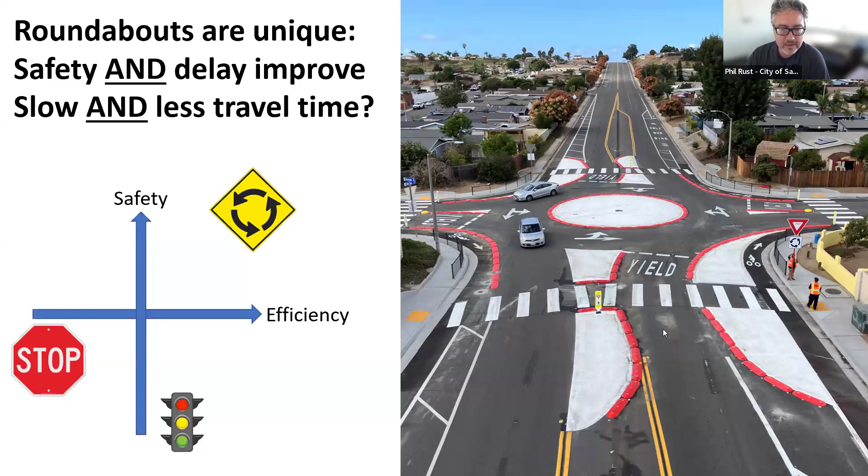And again, even though it slows vehicles down at the intersections, it eliminates all the unnecessary stopping, so your travel time also improves along the corridor. So that's all I have. Thank you very much, John.

Great, thank you, Phil. ISOAP is not just about roundabouts, but we do know that roundabouts are one of the safest forms of intersection. That's one reason why in District 6 we've been very aggressive in having roundabouts installed. We've built 14 in the last 10 years, but that number should triple in the next 5 years as we have a lot of roundabouts in the pipeline.

For the case studies, I'm only going to spend one to two minutes per case study, so not get into a lot of detail, but just kind of give you the concept. I mentioned earlier that we are going to have in-person workshops, and maybe some virtual workshops, where we'll be able to get into the case studies a bit more in depth.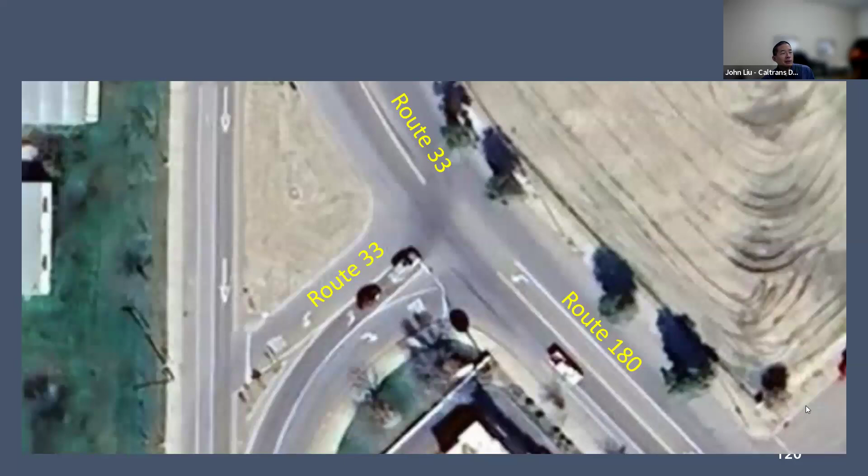So the first case study I want to talk about is a proposed roundabout in Mendota at Highway 33 and 180. This is just west of Fresno. The city originally applied for a CMAQ grant to install a roundabout. So, going through the steps, do we have to do ISOAP? Yes, absolutely.

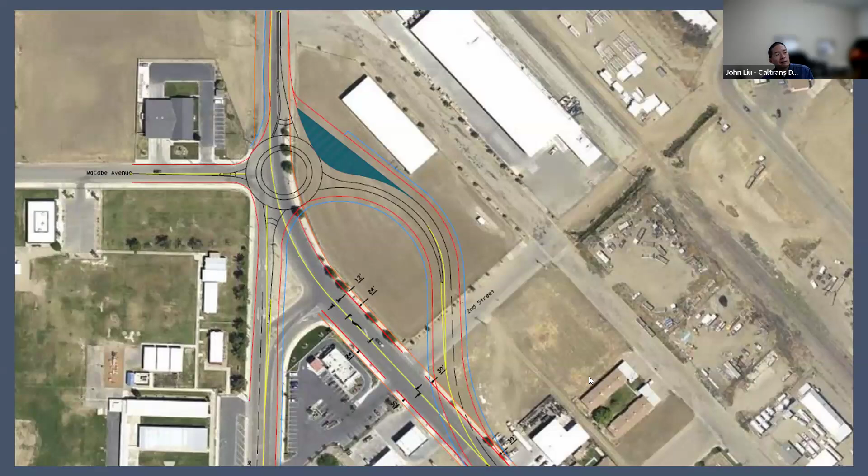So I want to get straight to the pertinent details. Initially we did signal warrants, and obviously it showed that the roundabout would work much better. But this was a location that had a lot of controversy, so we spent time actually looking at the signal alternative. The concept was relocating the intersection a little bit north, next to a fire station, McCabe, where there was a lot of traffic at a middle school.

But this realignment of the highway was actually very expensive. We found that it would not be affordable. So we were looking at a more detailed analysis of relocating the intersection to the actual current intersection location. The thing I want to point out is this project is already in the pipeline, but if we were going to be doing ISOAP, we would require a Highway Safety Manual for stage 2. This is where we really need to work closely with the districts, and with headquarters design, who will have to be doing some of the computer work.

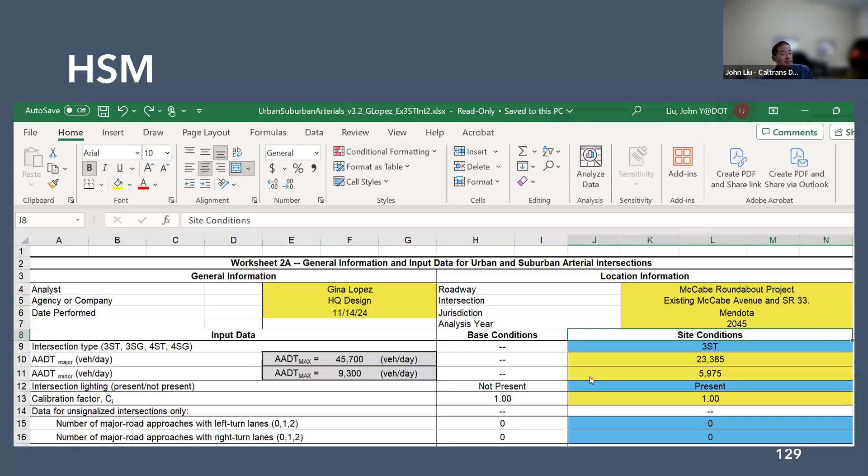So with the highway safety manual, if you're not familiar with it, there are crash modification factors that have to be inputted, and you have to determine what are some of those appropriate factors that will be utilized.

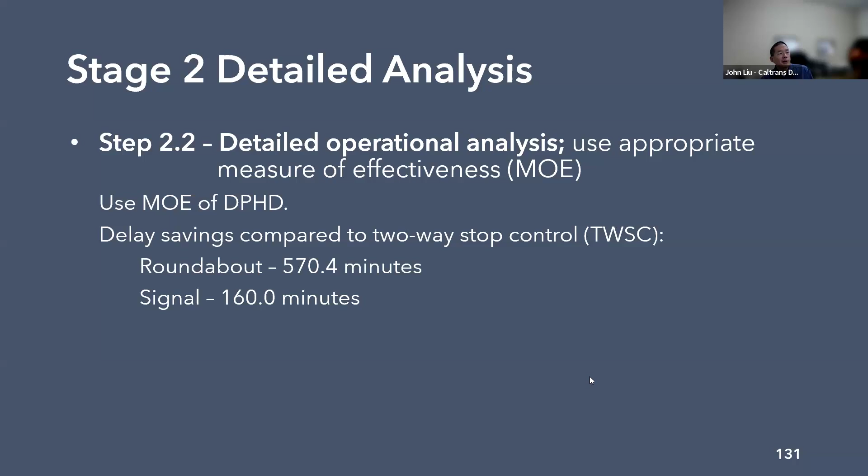I don't really have time to get into detail, but for the mobility analysis, as I mentioned before, we're using DPHD, daily person hours of delay. And when you're comparing the roundabout to the signal, it shows a lot of benefit with the roundabout.

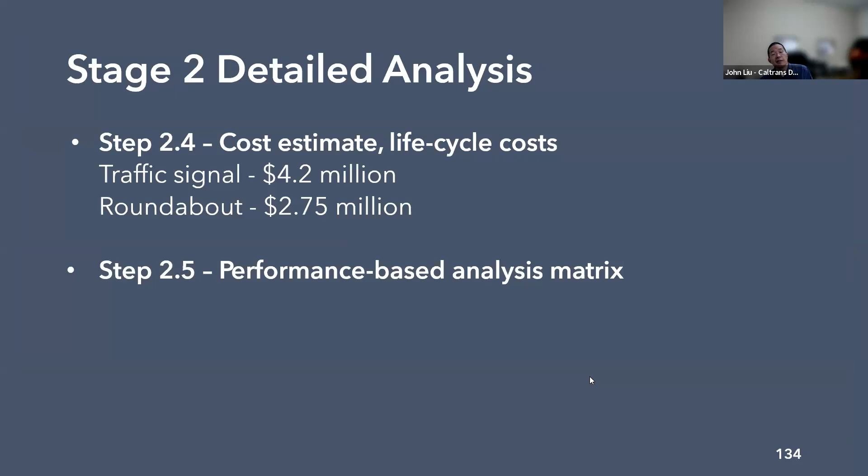I don't have time to get into the details, but I did want to talk about the benefit cost ratio. In this situation, the traffic signal was actually more expensive than the roundabout, because, as I mentioned before, there were realignment costs.

From the highway safety manual, it showed a slightly better outcome with the roundabout compared to the traffic signal. But when it came to mobility, much higher benefits with the roundabout. So when you do the matrix, we get an overall benefit of 17 versus 4 benefit cost ratio for the roundabout.

Obviously the roundabout is the much better solution, and this is one reason why we have the streamlined process. This is a lower volume location, less than 25,000, so you could go automatically to the roundabout because we know we're going to have better operational and safety outcomes. But this was a location that did have some controversy.

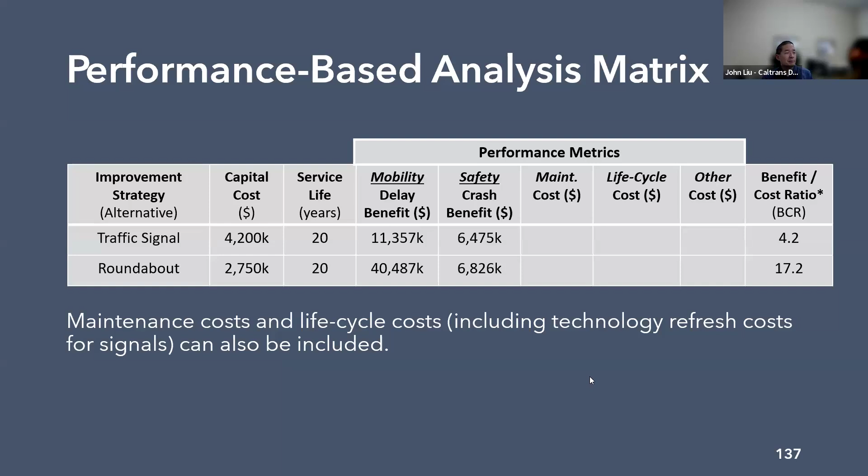The second location I want to mention is downtown Madera. We have a pavement rehab project, a 5-lane cross-section, and the city really wants to improve the aesthetics and the economic outlook of the downtown. One thing we decided to do was a road diet so we could add a bike lane, but obviously you'd be losing a lot of capacity by doing the road diet.

So I suggested introducing, at the time, mini roundabouts to recapture that lost capacity. It turns out we're actually able to do urban compact roundabouts, so it won't be a fully traversable mini roundabout, but it will be very compact. We will still be able to accommodate STAA trucks to make the through movement, and this will be like a 95-foot ICD, so it is going to be fairly compact.

As Jerry mentioned before, this is one way how you could do road diets. And by keeping the traffic flow, we're actually able to get credit for doing the road diet because of the VMT world, applying the reduced lane mileage and getting credit for other projects as we're doing the environmental document for this.

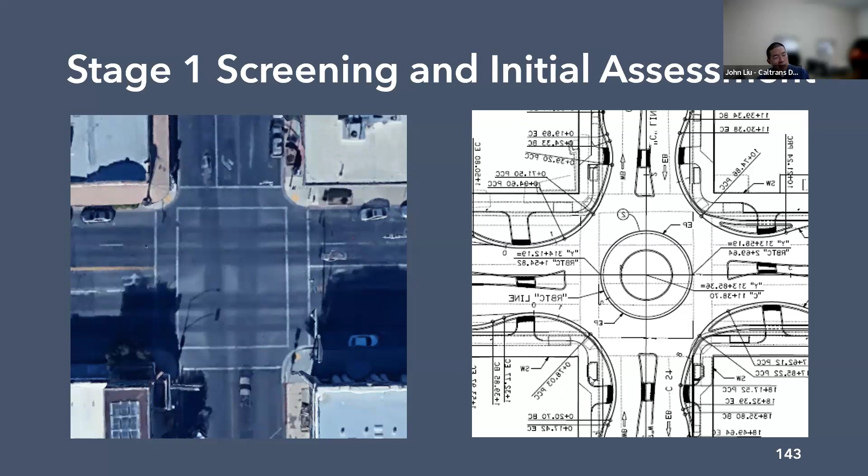The next project I want to talk about is City of Kerman, and a shout out to Jose Benavides, JLB traffic engineer. I know he's on the call. The school was building a new athletic facility across the highway from where the high school was.

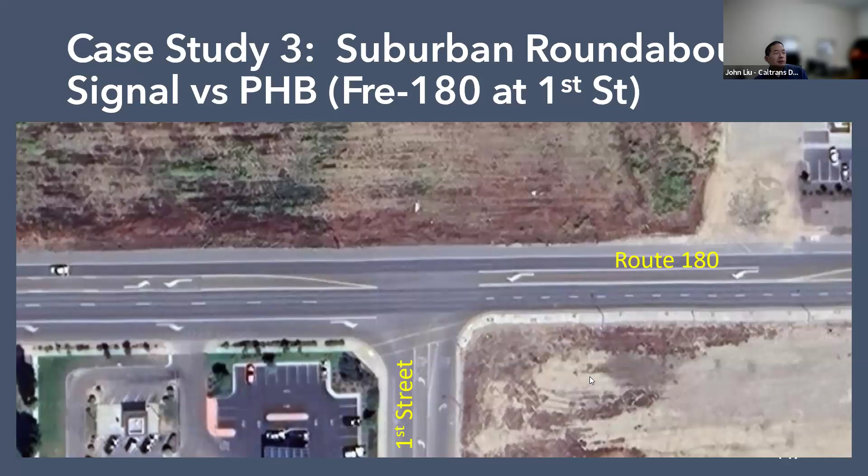We suggested early on placing a hybrid beacon, a pedestrian hybrid beacon. The concern is Highway 180 - eventually there may be an expressway bypass, but it is a very important corridor. We want to maintain that half-mile signal spacing.

By introducing another signal, which the city wanted, we just felt that it's going to have issues in regards to mobility. But we wanted to have the safety outcomes, and we felt that the pedestrian hybrid beacon would be the appropriate treatment.

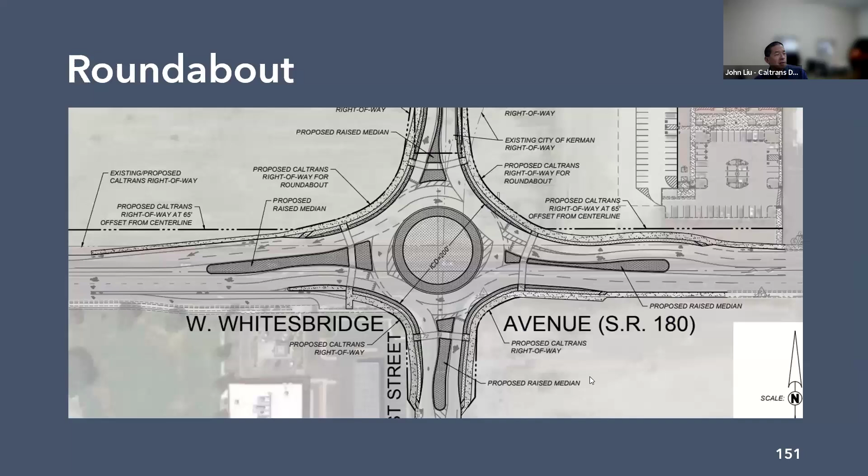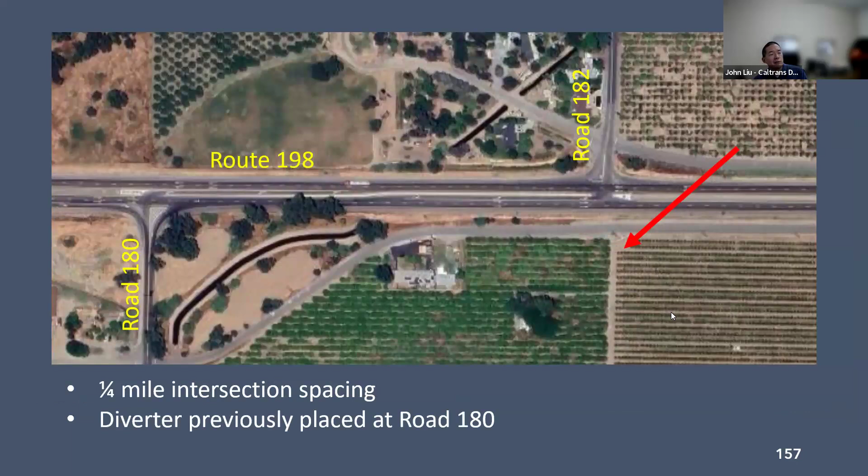The next example is an R-cut in a rural environment, kind of like an offset intersection. We previously put a diverter at Road 180, which is the west intersection, and we were starting to have collisions at the east intersection at Road 182. Ultimately, we decided that we are going to be putting in a diverter there too.

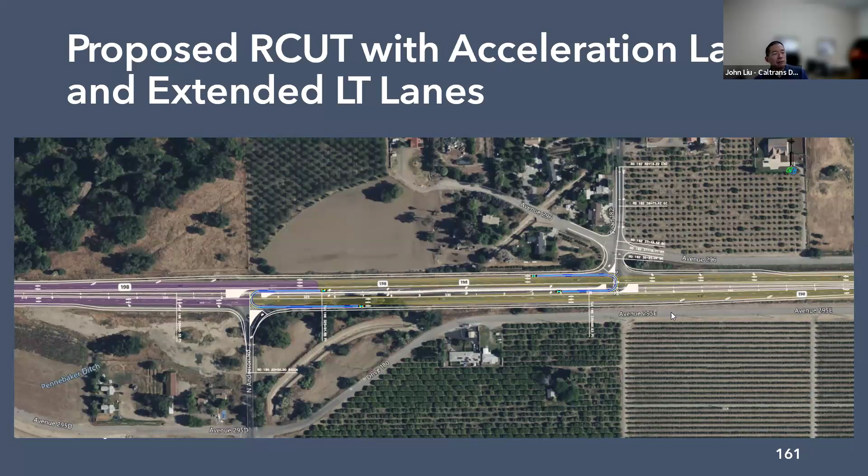So we went through, and this is a location where we're actually going to do the ISOAP. This is an actual project that we're going through right now because we are doing some widening to add some acceleration lanes. But so far the analysis shows that an R-cut treatment is the best solution.

The last case study is an interchange. This is in Tulare County at Paige Avenue, a very antiquated rural interchange next to a big truck stop. And we looked at 3 alternatives.

One was a DDI that actually has a roundabout, and this is where Caltrans staff did some very preliminary graphics or geometrics. We just found that it'd be very difficult to accommodate that 5-legged roundabout, and it would be very complicated.

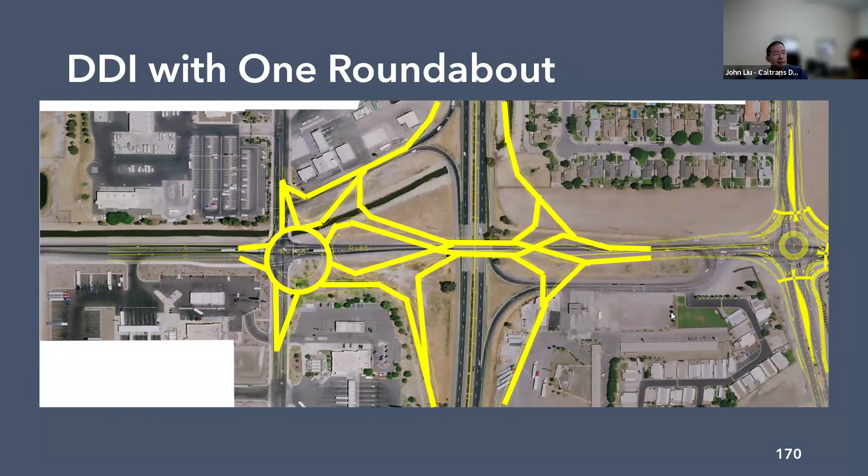We decided we wanted to go with a more traditional configuration, so we looked at 2 roundabout treatments. One was actually a single roundabout, kind of like a single point, one large roundabout right on top of the freeway. And the second alternative was a more traditional tight diamond roundabout treatment.

Ultimately, this is the decision treatment that was decided, and this will be under construction soon.

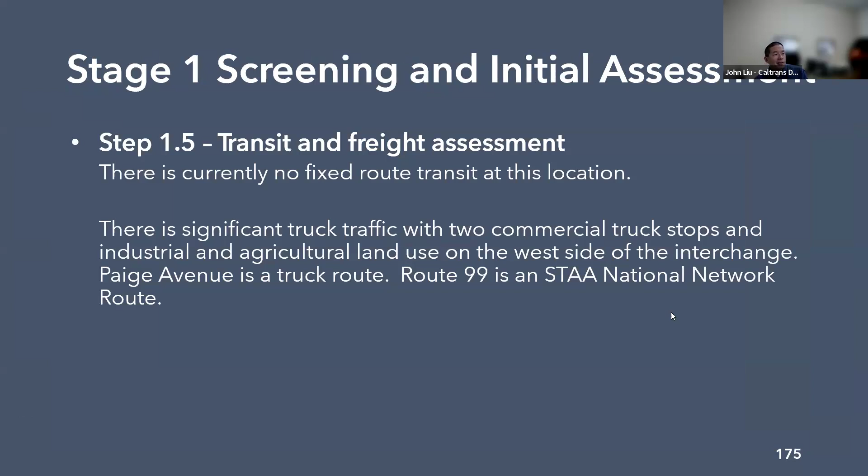That's all the time I have to go through the case studies. To wrap up, I want to mention that for support we have the ISOAP website and a technical assistance program with various Caltrans members, including myself. I also mentioned the upcoming workshops - we have in-person workshops being planned for districts 4, 6, 7, 8, and 11. We could potentially have additional workshops or virtual workshops, so talk to your district ISOAP coordinators if you're interested in participating.

And if we have a quick minute, I want to see if Robert Peterson is online to make a very quick announcement. So Robert, are you there? Yes, I am here. Okay, Robert, why don't you introduce yourself, and you have about a minute to make any kind of announcement that you need to make.

All right, let me turn my camera on here. There we are. Let me get my... all right, sorry about that. My screen's up here, my other screen, so it looks like I'm looking up.

I'm Robert Peterson, office chief over the local HSIP program. As most know, we just did Cycle 12 and completed the reviews of that. I'll be retiring at the end of this year, but that doesn't mean the cycle's going anywhere - it's being worked on with my team, and we're looking to fund. We got 330 applications for the last call, and we're looking to fund the majority of those - maybe around 280 to 300, don't quote me on that.